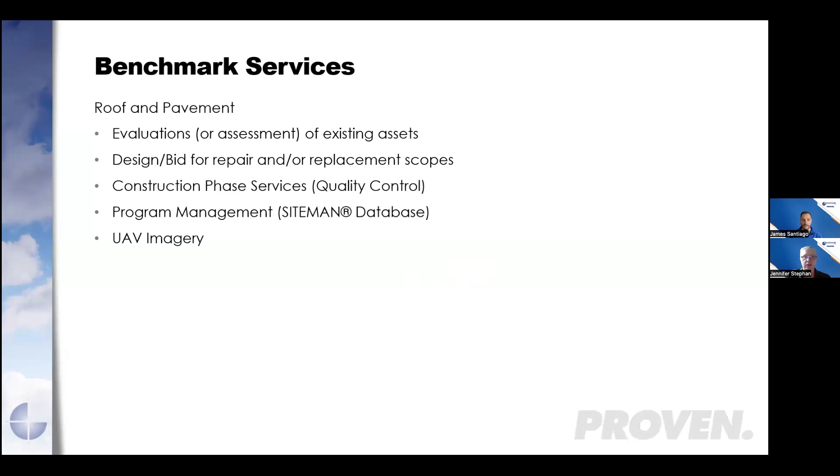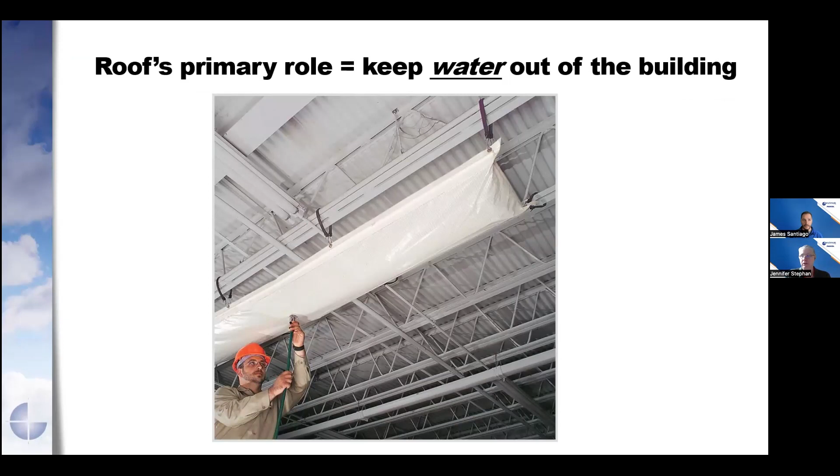It probably goes without saying that the roof's primary role is to keep water out of the building. Sounds simple until we start talking about all the other things we expect the roof to do for us. It can be a very difficult puzzle to design a roof to be long-lasting and watertight with all the other functions we need it to do.

In addition to covering the fundamental selection criteria today, we will also talk about service life, ease of install and repair, and other options that come into play. We plan to focus on the food and healthcare industries, but we'll also speak a little bit about the other categories that we discussed on our poll question.

We're going to first take a few moments to do an overview of roof system types so that we have some common language and foundation to talk today. Then we'll talk through the different criteria used to select a roof system.

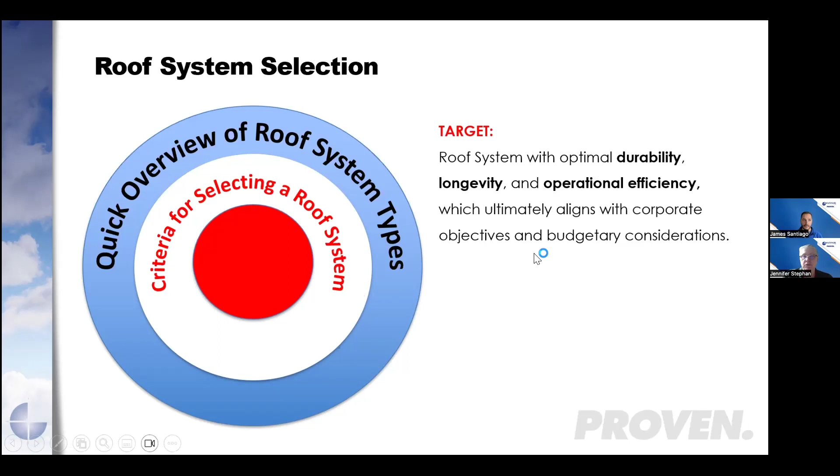It's important to keep our target in mind throughout the entire selection process. The goal of any roof project is to design a roof system with optimal durability, longevity, and operational efficiency, which ultimately aligns with your corporate objectives and budgetary considerations. James is going to take us through some of the most common types of roof systems and membranes.

The first roof system type we have here is EPDM, which you may know as ethylene propylene diene monomer, or more likely just rubber. EPDM roofing membrane was first introduced in the 1960s. It's typically installed over coverboard and or insulation boards.

It's available in black and white options. The sheets can be installed mechanically or with adhesives, and ballasted assemblies are also available. Seams are adhered and cannot be hot air welded compared to some of our other roof systems.

One of the benefits of EPDM is its ease of repair, being able to perform repairs with cold applied materials and not requiring any special power tools.

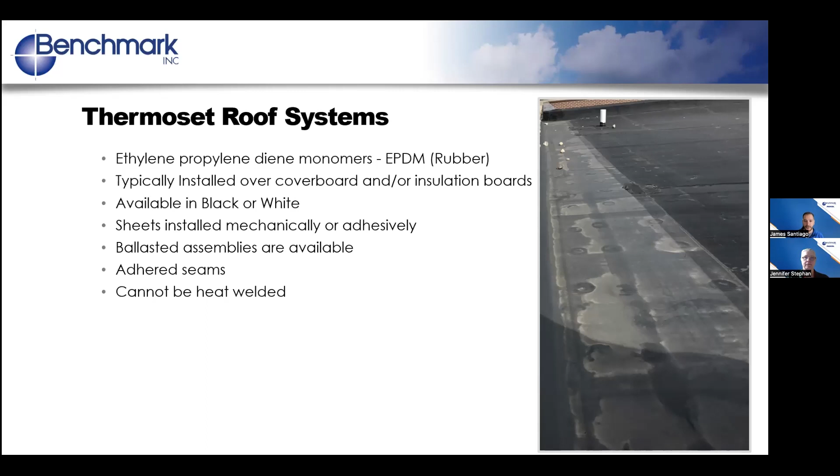Next we have thermoplastic roof systems. The roof systems which fall under this type are PVC, KEE, and TPO. Thermoplastic roof systems are typically installed with the coverboard and or insulation board.

It's available in white, tan, gray, or specialized custom colors. Sheets can also be installed mechanically or with adhesives, and ballasted assemblies are available. The seams on this membrane are hot air welded, unlike EPDM.

One of the benefits of thermoplastic roof systems is its resilience to ponding conditions due to its hot air welded seam construction, though the repair methods do require special tools, and those tools will need a power source.

We have a mixed variety of introduction dates into the market, with PVC being introduced around the 1960s, KEE being introduced in 1979, and TPO around 1989. These single-ply membranes are widely available and can provide lasting service for food manufacturing and healthcare facilities.

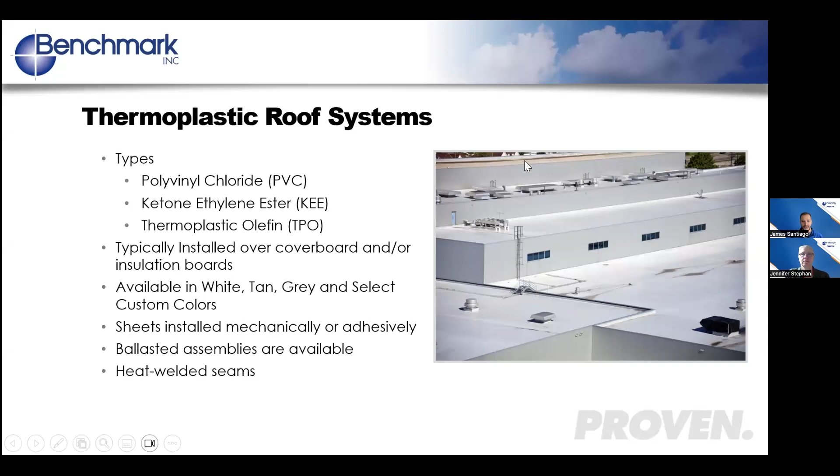Next up, we have our modified bitumen roof systems. Modified bitumen roofs are asphalt-based. Mod-bit roofs are typically installed over coverboard and or insulation boards, similar to the previous systems. The sheets are installed with adhesives or can be torch applied as well, though not as common due to risk.

Seams can be sealed with adhesives or welded. Typical finish on this membrane will be granule surfacing, or you'll find a smooth finish with an aluminized coating or some sort of coating application.

Modified bitumen roof membranes were first introduced in Europe in the 1960s and made it over to Canada and US around 1975. Modified bitumen roof systems are a bit more robust than single-ply roof systems, as it contains multiple layers adhered to form the roof membrane.

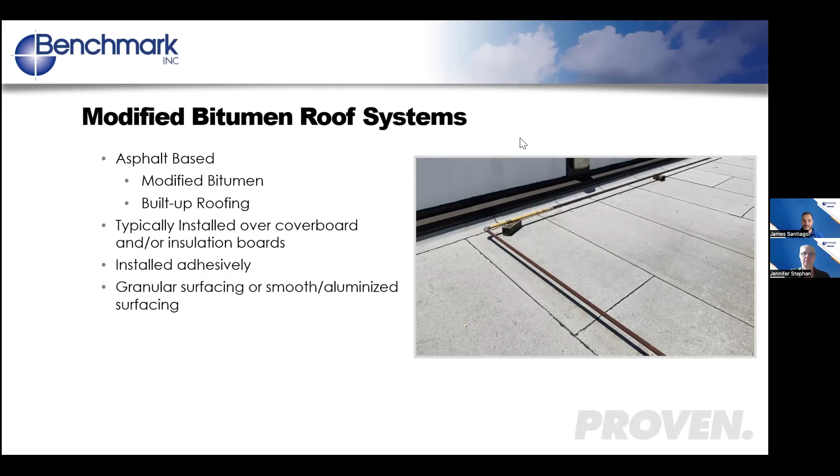Next up, we have liquid applied roof systems. Liquid and spray applied roof systems include spray polyurethane foam, elastomeric systems, and silicone systems. These can be used as a new roof application or a recover application. They are monolithic, meaning it's one continuous layer rather than multiple sheets seamed together.

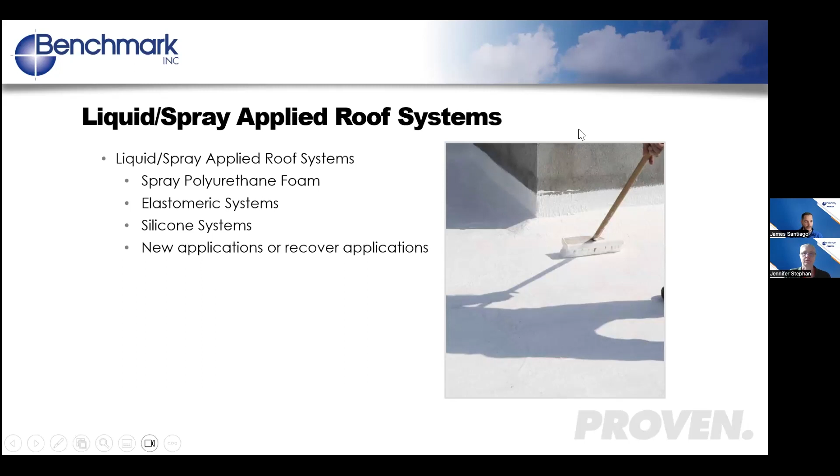Next, we have metal roof systems. Metal roof systems are either architectural or structural, with architectural metal roofs installed over a solid piece of decking, typically plywood or OSB. Structural roof panels are structural in nature with no underlying decking. Metal roofs are typically insulated from the interior with batt insulation and a plastic vapor retarder, or they contain no insulation on the underside at all, which is typical for any unconditioned warehouse space.

Metal roof panels can be secured with concealed clips or exposed fasteners as structural supports, and they're mechanically attached and sealed at seams with butyl tape or sealant. Although not as common for healthcare facilities, many food manufacturing plants have buildings protected by metal roof systems. Whether through-fastened or standing seam, metal roofs provide long-term protection for production and warehouse spaces.

Other notable roof systems, though less common, include shingle roofs on commercial properties, aging CSPE, or coal tar pitch roof systems. We aren't seeing as many of those anymore as the older systems have been replaced.

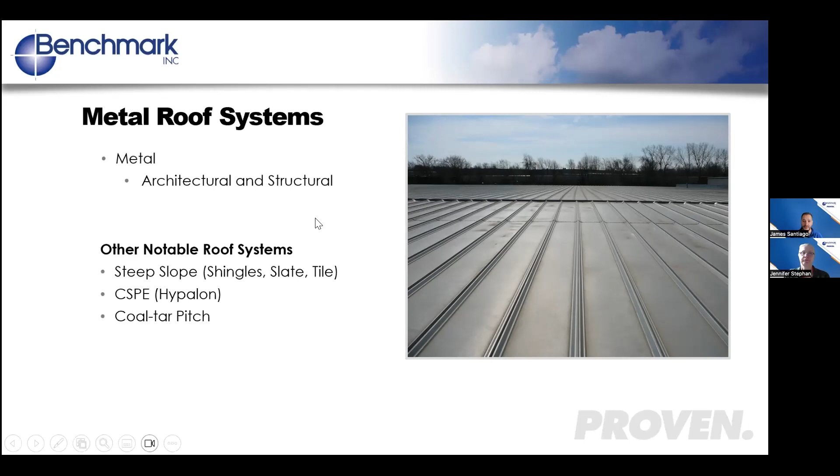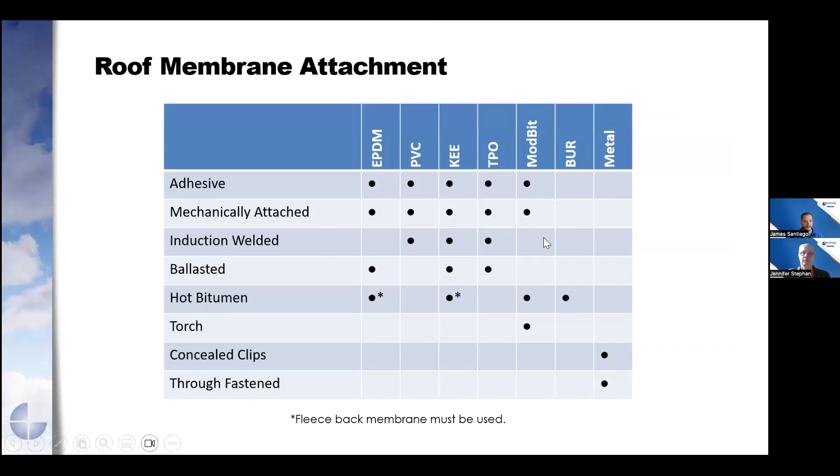To visually encapsulate some of our discussions, we've attached a roof membrane attachment chart here. As you can see, there are many ways to attach various roof membranes, but by far the most common are adhesive and mechanical fasteners.

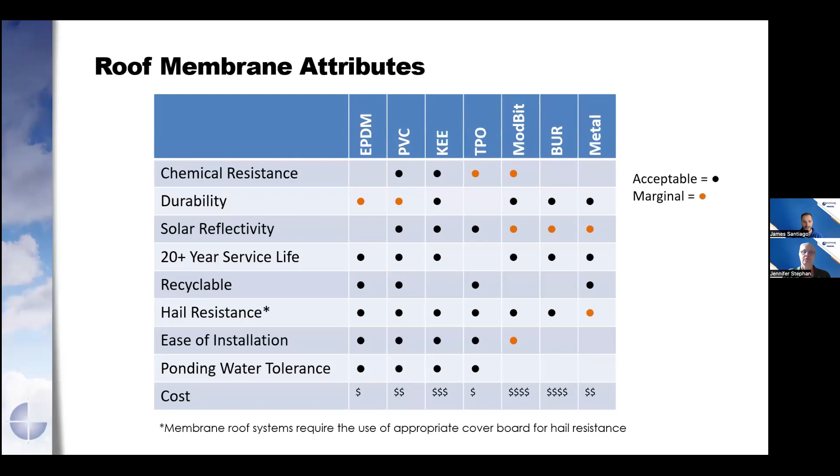So now we're going to get into the meat of our program. Which membrane should you use, or which system should you use? If only it was as simple as selecting one based on membrane attributes, our job would be very easy. But there's a long list of criteria to consider. Some of the criteria are optional and others are required.

The easiest place to start is always with the requirements, and then work down the list in terms of client priority or wants. Sometimes insurance requirements will take the next priority, sometimes budget, sometimes schedule. Sometimes it's leaks that impact production that bring the roof or the system right to the forefront. It all depends on the individual client and the location.

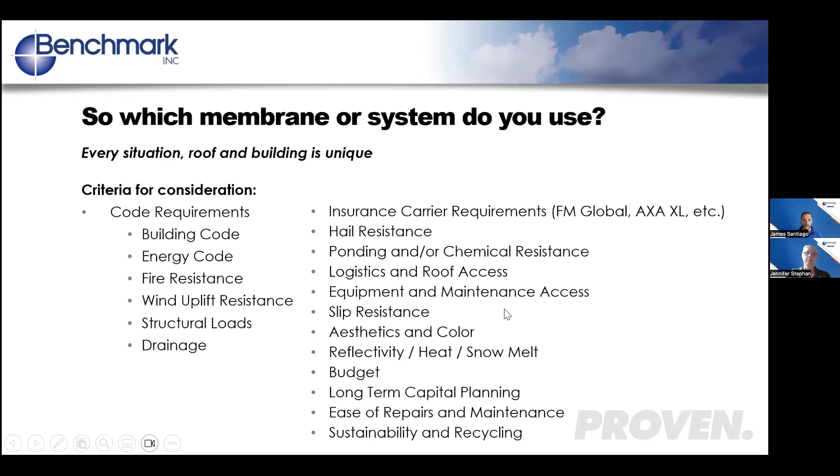So let's talk a little bit about the requirements. Building codes define the legal requirements for each location. It's interesting to note that across the US, some areas are still using the 2009 IBC, while some have adopted the 2021 version. Yet, as you can imagine, the requirements vary significantly between the different versions of the code and local amendments that might be adopted.

You can see here just a couple of high hitters: Miami-Dade County for Florida, Title 24 for California. Those are going to have much more stringent requirements or different amendments than, say, a county in Missouri. Let's talk wind for a minute.

As we focus on the roof to keep the water out, there are several forces of nature that work against us. Wind is one of the primary ones, and it's also one of the primary causes of failure for roofing. It's important to make sure that your roof will hold up to the normal environmental forces that happen at your site, including weather events and typical storms.

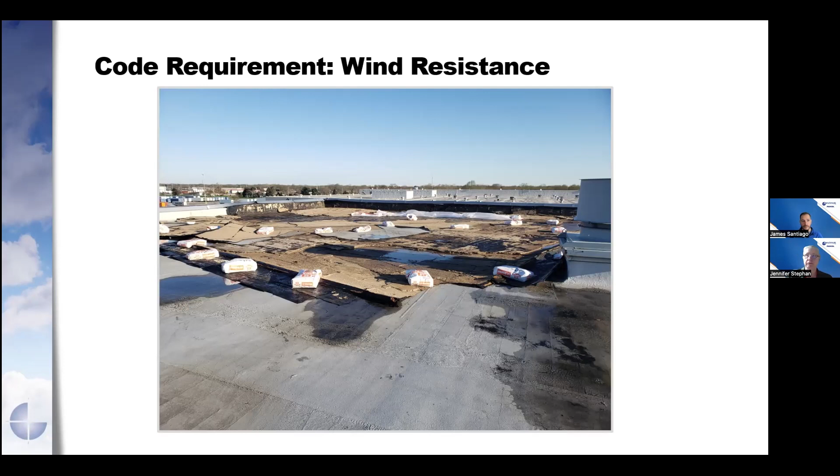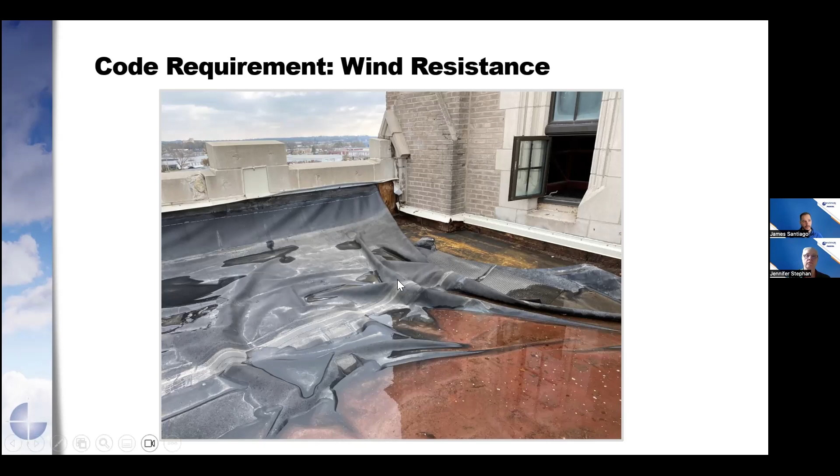Fire resistivity is another code requirement for roofs that was born into code after the 1953 GM Hydra-Matic plant fire. This plant outside Livonia, Michigan was only 4 years old and was state of the art for its time. There are a lot of theories about how the fire started, but for us in the roofing industry, the key takeaway was that the roof, a built-up asphalt roof system on a steel deck, actually contributed to the fire as the asphalt melted and released tons of liquid molten asphalt into the building, fueling the out-of-control fire.

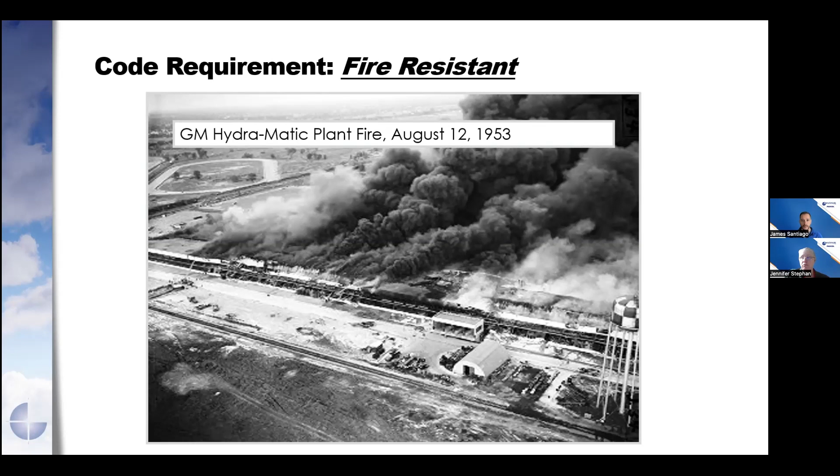This event was part of the stimulus for early code additions requiring UL testing for roof components and separation to slow fire spread, to allow people time to evacuate and hope to contain the fires.

On roof replacements, remedying poor drainage can be accomplished by adding tapered insulation panels and crickets, but for some projects, drainage can be extra challenging just due to flashing height limitations and roof obstructions.

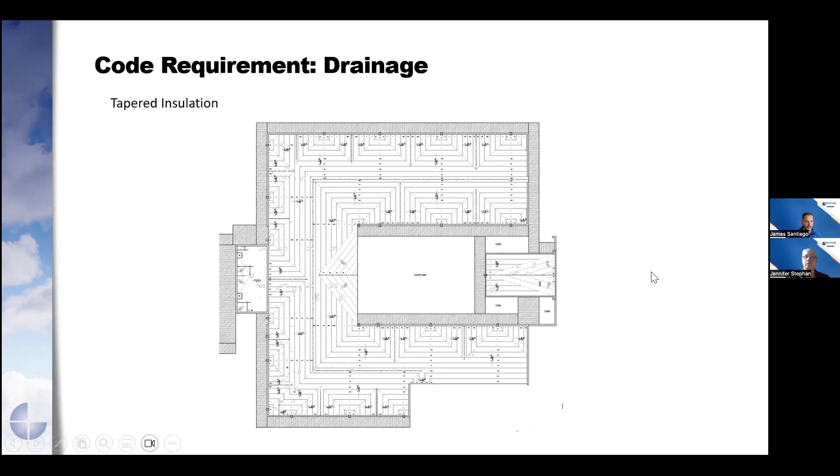Some membranes and systems have characteristics which are more resilient to ponding conditions. Ponding conditions can accelerate the effects of UV exposure on the roof system, as it can act as a magnifier of sorts. Ponding water also tends to collect debris and dirt, increasing the chance to obstruct drainage outlets.

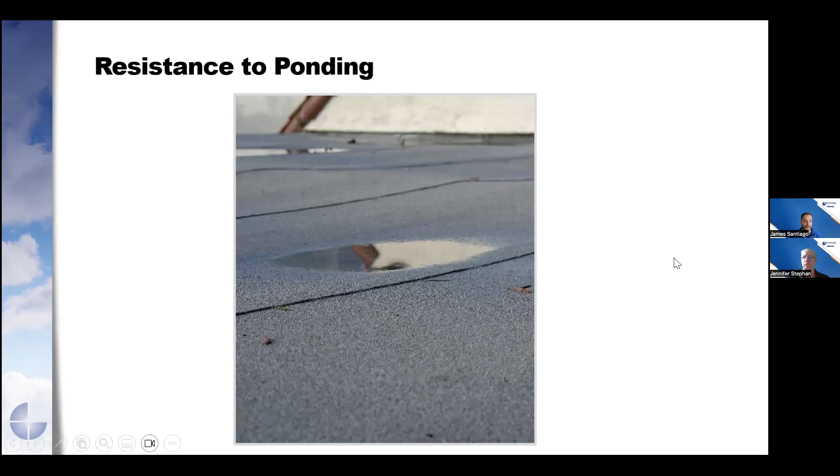Although not a code requirement, designing for hail resistance is an insurance carrier requirement for FM Global, Global Risk, and AXA XL insurance. Requirements for levels of hail resistance are based on your geography, or the site geography. It's simply good practice to design systems to withstand weather normally anticipated at the project site, whether or not it's required by code or the insurance.

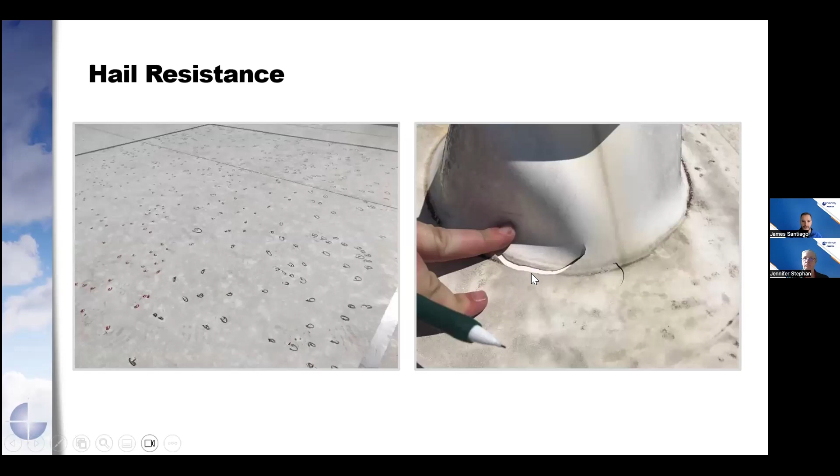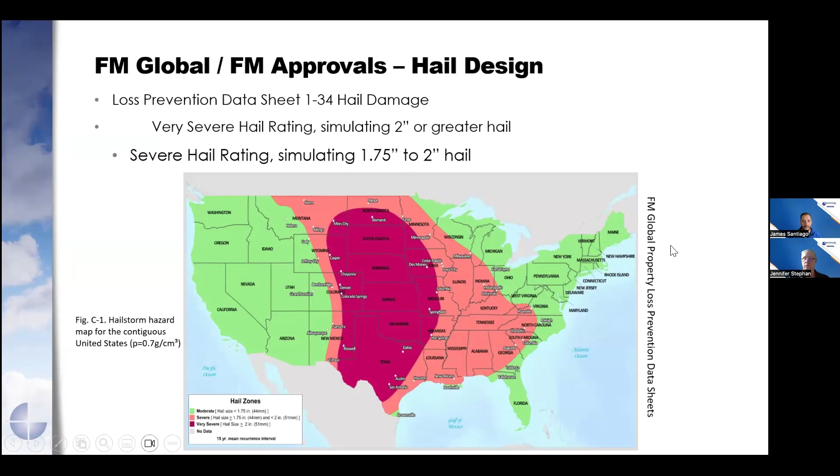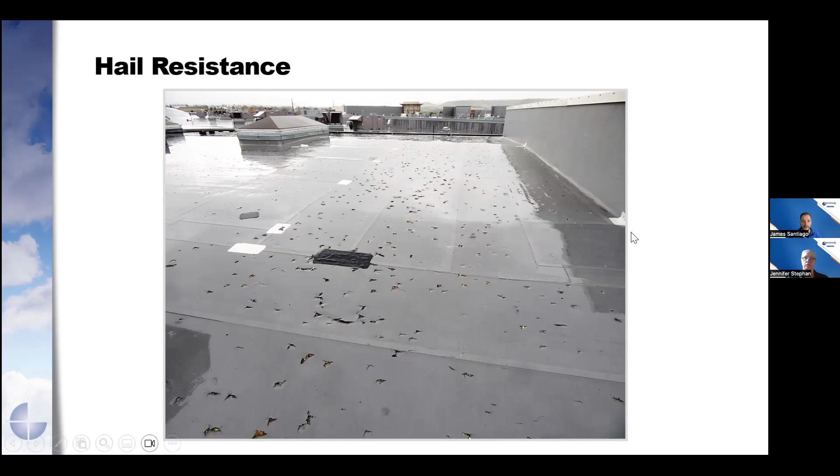So we've talked about some of the most common code requirements. We skipped over thermal requirements. The energy codes do prescribe the amount of insulation that needs to go in a replacement roof or a roof recover. Not very many exciting slides to present about thermal insulation, but it is another code requirement that must be considered as you look at different systems.

Let's talk some about the unique criteria for many food and healthcare manufacturing plants. Some of the challenges for your roof projects are that there are no breaks in occupancy or production for food and healthcare. You run 24/7, there's no downtime. Your interior activities are highly sensitive to dust, debris, or odor infiltration, and you oftentimes have open food conveyors or open surgery suites below these roofs.

You have some extreme temperature applications within the building, sometimes room to room in the same building. There's a much different design for a -10 freezer than there would be for an office space or an unconditioned warehouse. You also have typically high humidity areas, washdown areas, ovens, cookers, kettles, process areas, showers, therapy pools, all housed within the same facility or building.

Many of your facilities also have chemical discharge onto the roof with fats, oils, and greases. Some of these chemicals released are the natural solvents for roofing membranes and adhesives, or are highly acidic or caustic and will actually cause severe damage to the membrane.

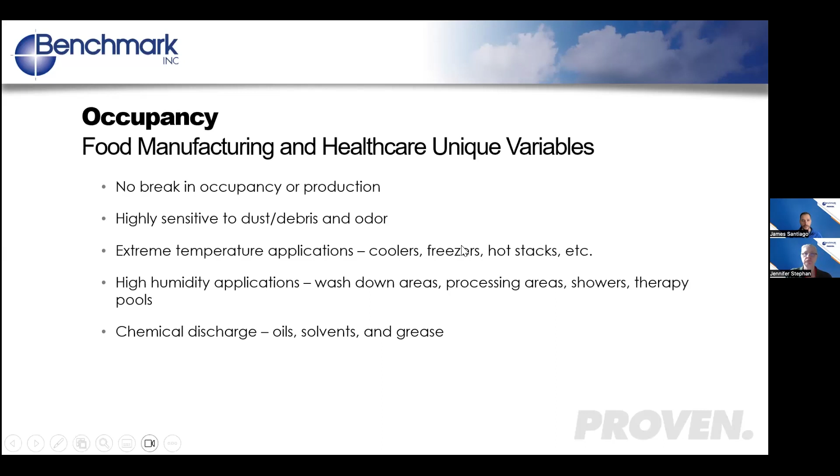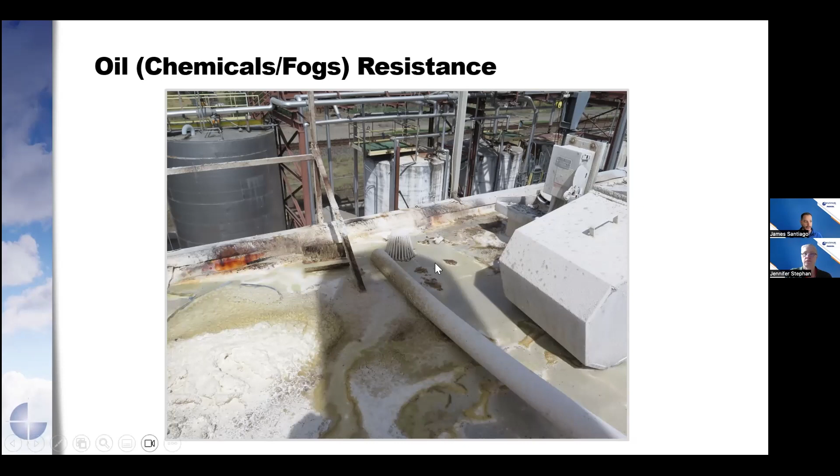And here we have another example of contamination on the roof system. In general, contaminants can greatly reduce the roof system's life. Some items to consider include whether you can install a containment system around equipment, or is this a location where a mechanical scrubber can be utilized?

And what do you need to do for that drainage as well? Does it need to be prevented from entering the storm system, or does it need to be treated in accordance with the EPA guidelines before it can be released into the storm drain system? There's a lot of considerations that go into how to treat the chemicals as they actually drain off of the roof.

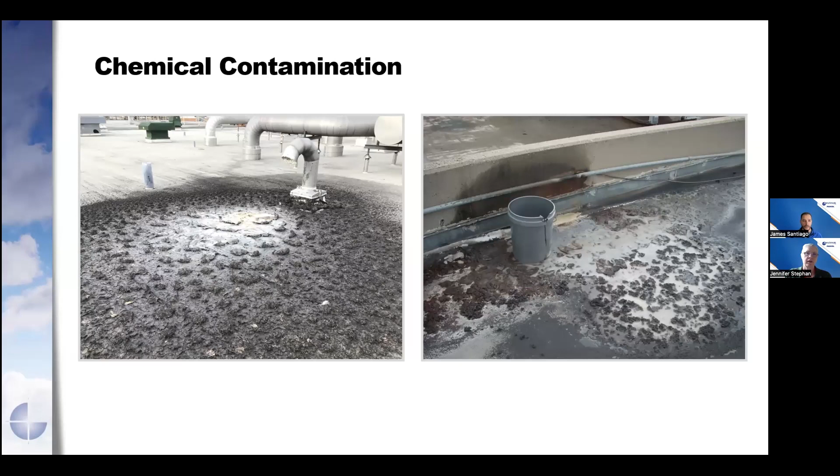High humidity areas have the opposite vapor drive, inside to outside, which can cause extreme wetting, mold growth, and deterioration wherever that warm, moist air travels to escape the roof or the wall.

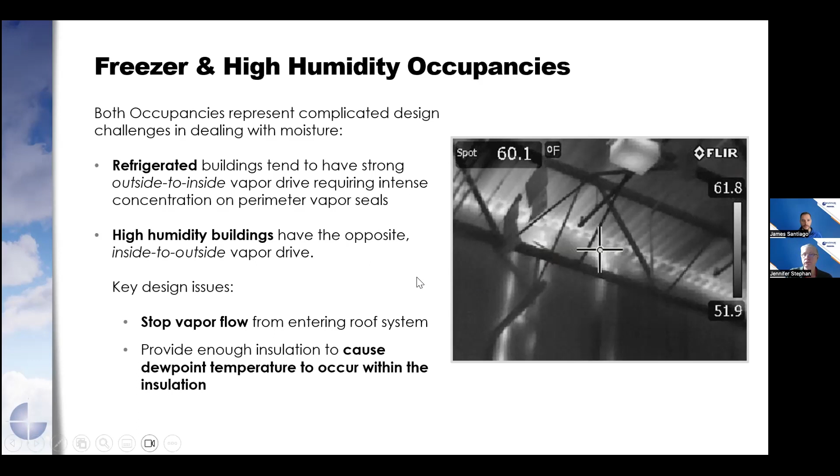Another factor unique to many food and healthcare facilities is the tendency to place most, if not all, of the air handling mechanical systems on the roof. All of that equipment needs to be maintained monthly or sometimes more frequently, which causes a lot of foot traffic on the roof. Some roof membranes are extremely slippery in wet or cold conditions. Will walkways be needed? What kind of safety do we need to include in the roof project? What measures are in place to keep those workers safe while they access this equipment?

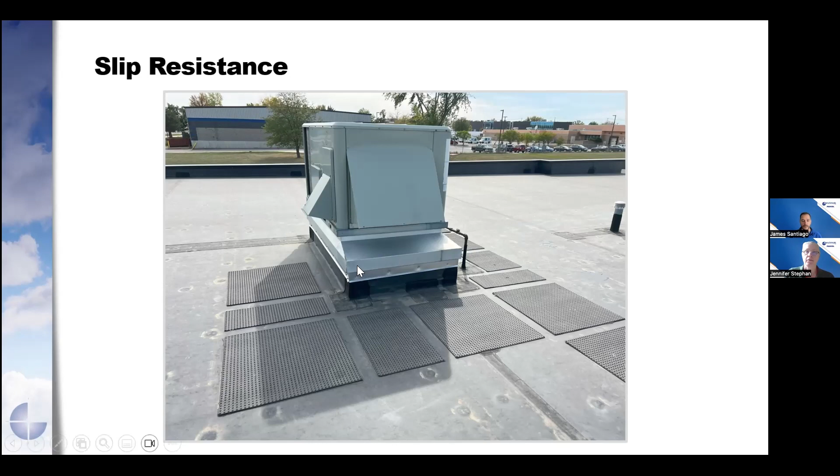Another unique characteristic of many food and healthcare facilities is expansion. Many facilities have been built up slowly over the last 30 to 75 years, meaning there are newer areas, newer buildings attached to older construction. The new roof systems are expected to facilitate and accommodate that thermal and structural movement of the building, both new and old, and still keep the water out.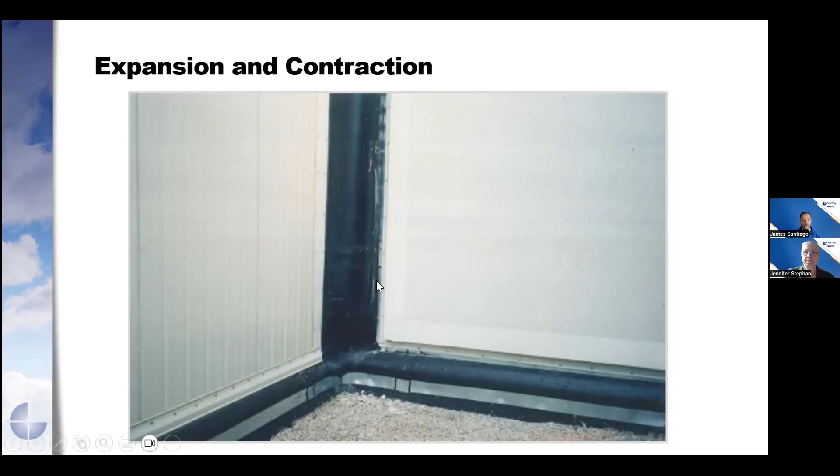Emergency room doors are always open, and healthcare never stops working. Likewise, to meet the demands of the hungry masses, most food production facilities are running 24/7. This drives some companies to select roof systems that are going to minimize interruption both during the initial installation and over the life of the roof system.

So it's important to consider, what do you need to include in your roofing project for interior protection? What is it going to take to maintain this roof? How much odor will it cause as you repair it? How easily can it be modified in its future life?

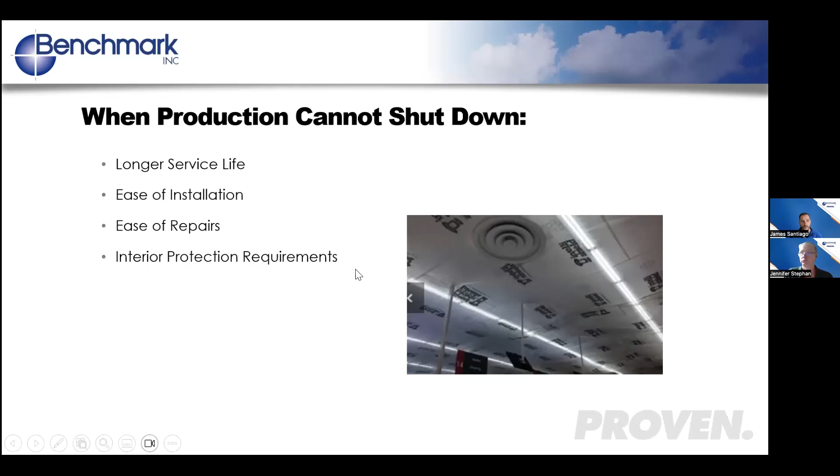So now we're going to kind of go into service life and maintenance. With all the conflicting priorities facing many facility managers, sometimes roof maintenance falls to the bottom of that list. Selecting a roof system that's going to provide adequate performance with little maintenance over the longest period possible is often the best step towards reducing future problems. I encourage you to think about your current maintenance program in place, and whether you even have a maintenance program in place. If not, it's something you should consider.

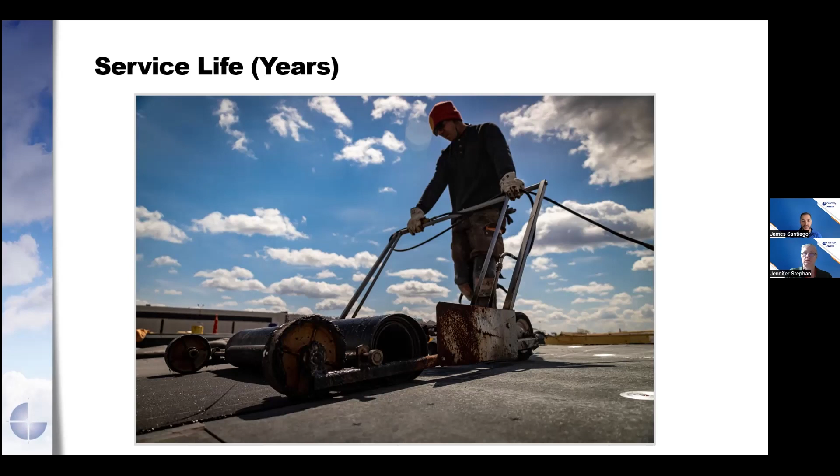When we hear the word sustainable in our industry, we normally think about products when they're first installed and when they're removed, but there is a space in between there. Sustainable maintenance practices can assist in maintaining your assets for longer periods of time, not only deferring replacement, but reducing your impact on the environment.

This is part of what helps us. Determining ease of repairs and preventive maintenance is another aspect. This is what helps us in guiding. Since maintenance is unavoidable, taking into account whether the system can be easily repaired is important.

If we have equipment and outlets which can be utilized for service contractors on the roof, they are more likely to hot air weld a patch on a PVC roof system compared to performing an improper repair. If the roof system has no means of access, clearing drains and performing preventive maintenance is less likely to be done.

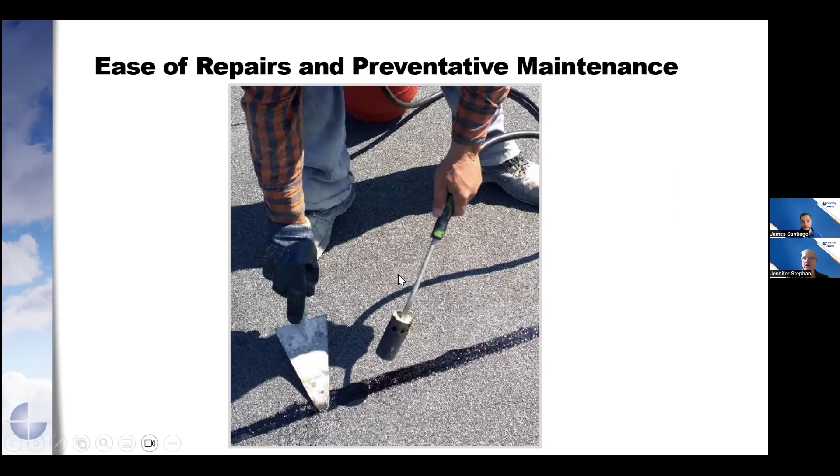So we've covered the common types of roof systems and some of the important criteria for selecting a roof system. Now we've got a couple examples here so we can talk through our thought process as we select a roof system. I'm going to put James in the hot seat first.

All good. Let's see, so we have scenario 1 here. On these next few slides, the facility is a food production facility located in southern Texas. The facility manufactures fried snacks, and towards the south side of that picture, we have some grease containment systems which haven't been too effective. Working with the owner, it was determined that rooftop traffic was moderate with equipment that requires maintenance and periodic repair. As previously noted, there is a severe level of oil discharge on the roof membrane.

Due to the increased risk of damage from oil contaminants, we recommended the specification of an adhered KEE membrane system. The roof membrane provides superior resistance to numerous chemicals, greases, fats, and environmental contaminants compared to typical PVC and TPO membranes. The off-white membrane helps provide ultraviolet resistance. This is specifically important. We also specified a reinforced membrane compared to a non-reinforced one, which is specifically important due to high foot traffic and equipment maintenance.

As the client was FM insured and under a very severe hail rating location, the membrane was paired with an adhered gypsum coverboard.

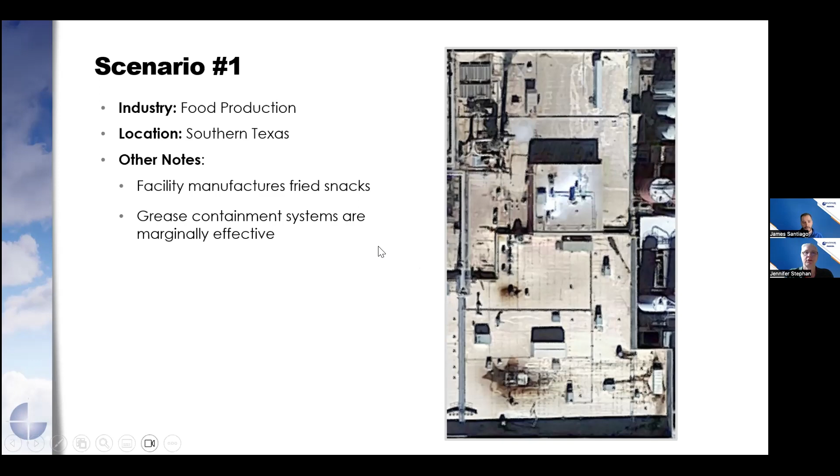Very good. Our next scenario is a hospital in South Florida. As you can see, this area to the top of the photograph has a very old aluminum coated smooth surface modified bitumen roof system. This location is under the 2021 IBC and under the Miami-Dade requirements as well. To further complicate things, they are FM Global insured. So not only did we have Miami-Dade and the newer code, but we also had FM Global requirements to meet.

This is an operating room beneath this dark area of the photograph, and the work was only allowed to occur in the evenings, an 8-hour shift each night as they shut down the operating room for us. They did not have any tolerance for dust or any infiltration of debris and needed full interior protection after we found that the deck was deteriorated.

It was a gypsum deck with a lot of water damage. The main access point for the hospital was actually on the left side of this dark roof, which accessed about 40% of the hospital facility. So not just this roof, but a lot of foot traffic crossing this roof to access all of the mechanical equipment on the rooftop and adjacent roof systems.

The owner was very familiar with modified bitumen roof systems. So when we asked them what type of maintenance program they had, they said that their most common type was modified bitumen and that was what they were used to repairing and taking care of. Three of the sides of this roof are bordered by modified bitumen roofs, some newer as you see in the bottom of the photo, and some just as aged as our operating room.

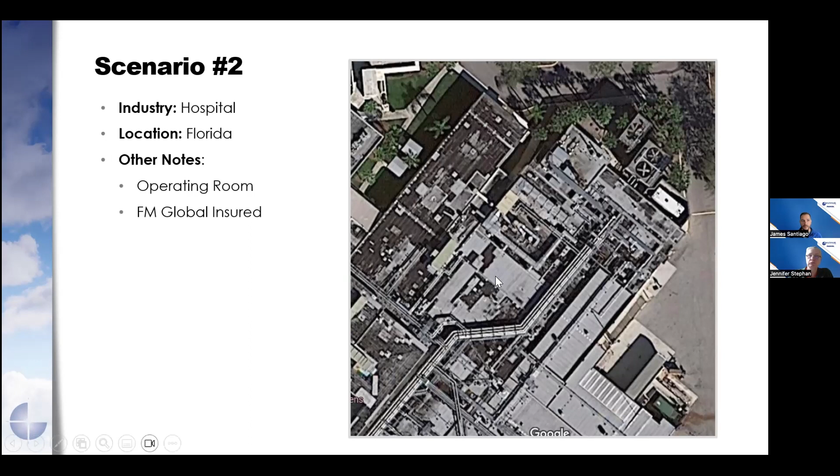Next scenario, I'm up again. We have a food manufacturing plant in Missouri. As you can see in this photograph, this area at the top, long-wise, is over production and a cold storage or cool storage area. It had numerous repairs over its service life.

It is a modified bitumen system now that has been leaking, and they've been trying to repair it for years and years. This facility is under the 2009 IBC. They are FM Global insured, and there's a requirement for very severe hail rating in this area of Missouri. The occupancy, as I mentioned below, is an open product line with continuation into the cool storage, so pre-freeze, cooled storage area.

The ceiling below was exposed to the production, so there was no drop ceiling, there was no interior paneling or anything to protect the production line. We ended up having to propose going with a full interior protection system to protect that product line from falling debris or dust.

The client wanted a 25-year roof system. Actually, they really wanted a 35-year roof system, but settled on a 25-year roof system, and they have a robust maintenance program in place. Most of their experience in their maintenance program was with modified bitumen roof systems.

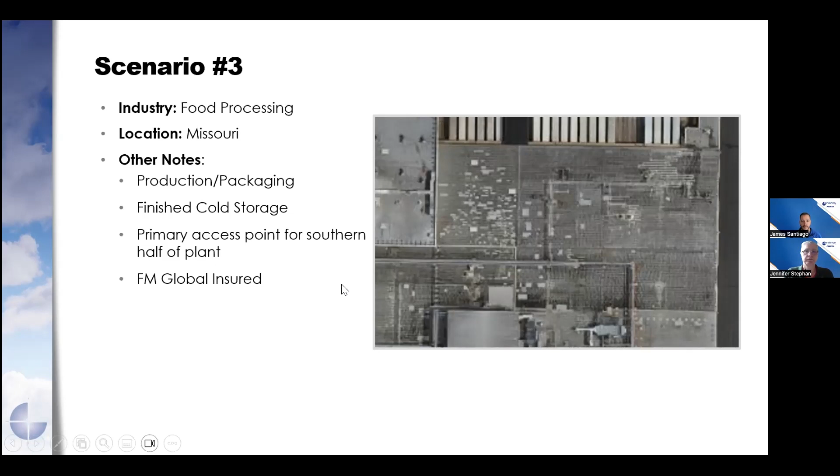All right, in this scenario, we have a pharmaceutical manufacturing facility located in Virginia. The rooftop equipment here is mostly fresh air vents and exhaust fans with some HVAC equipment scattered throughout.

The site experienced some recent hail damage on some of their older TPO and CSPE roof systems, and they are FM Global insured. This site was unique in that they operate 24/7 and will not shut down for interior protection. So they tend to perform their large replacements during an annual shutdown, which is a 2-week window.

On this particular project, we partnered with the contractor and had a nuclear moisture survey performed on the roof area. The nuclear survey was performed because the current assembly has two roof systems in place, and the nuclear survey can accurately detect moisture penetrating the underlying sections as well as the upper portion of that roof area.

Once we determined the areas of saturated roof components, we had the areas outlined and provided a scope of work to remove and replace the wet areas during that 2-week shutdown window, along with installing interior protection.

Once that work was performed and the wet insulation was replaced, the contractor will install an elastomeric coating over the residual roof area. The installation of the elastomeric coating won't disrupt interior operations, and it's performed at the surface level. Because they are FM insured, it also required an approved coating assembly.